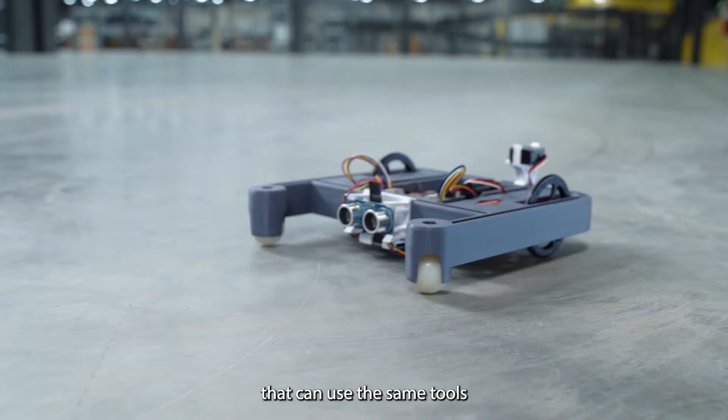The XRP, or Experiential Robotics Platform, includes all the hardware and software needed to build and program a robot that can use the same tools for programming full-sized FIRST Robotics Competition robots. This allows for a low-cost way to experience FRC experimentation on a smaller scale.

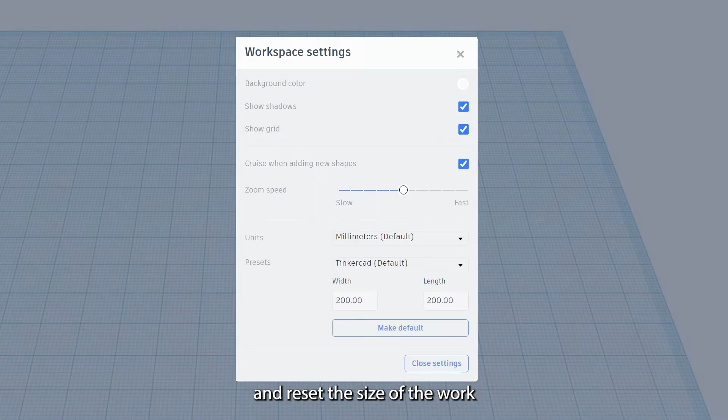Here we will go over how to easily print or make modifications to the chassis when your 3D printer's bed is not large enough to fit the entire chassis. The first thing we'll do is go into Settings and reset the size of the workplane on the project. In this case, we're using an Ultimaker S3 3D printer, and the bed size is 187 by 227 millimeters. Once you click the Close Settings button, you will see the workplane size update.

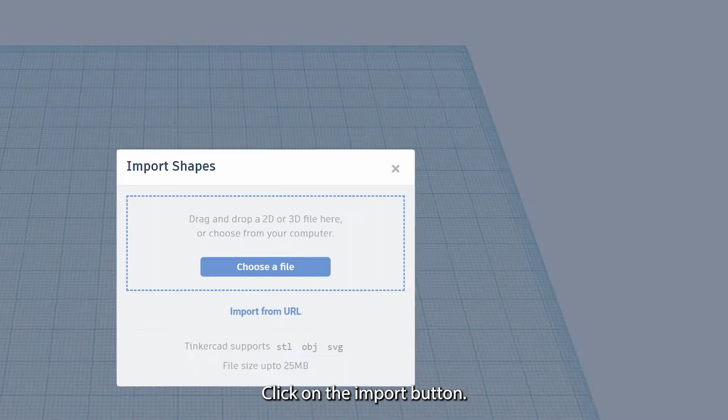Next, we will import the STL file from the computer. Click on the Import button. Not shown on screen, it loads another page where you can select the location of your file. Once you've selected your file, click OK. It will then load that file into the software. Next, click Import, and after a few seconds, the file will load into Tinkercad.

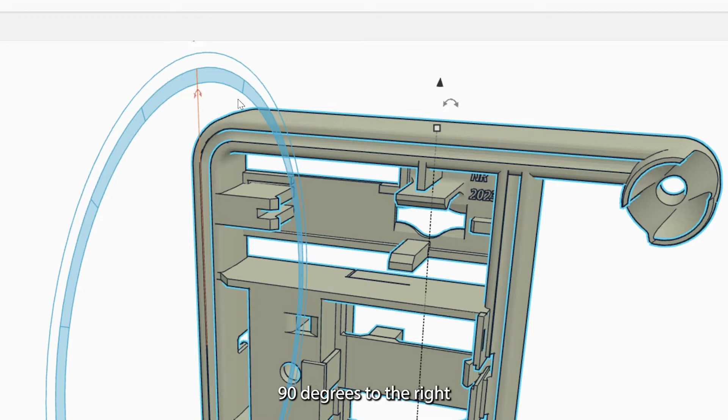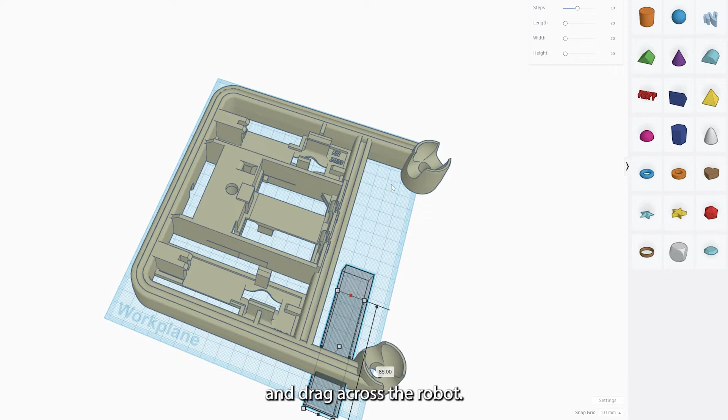Click the Rotate function and rotate it 90 degrees to the right so it lays the top side down. Once rotated, press D on your keyboard to drop the robot frame to the workplane. Next, we will move the robot to the center of the workplane. To start modifying, grab the Hole Cube tool and place it beside the robot. Once placed, grab one of the modification handles on the hole box nearest the frame and drag across the robot. Make sure the box is beyond the opposite side of the frame.

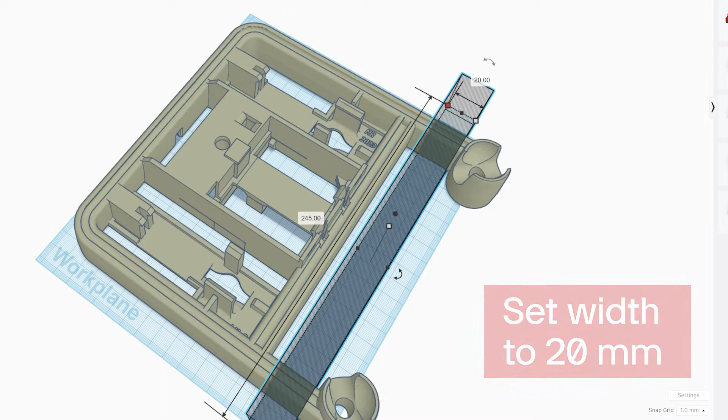Next, select the Hole Cube again and select the grab handle in the center of the box by clicking on it. Set the height to 50 millimeters to make sure it is completely above the frame. Then, click on one of the width grab handles. Type 20 millimeters into the width dimension. Next, duplicate both the frame and the hole cube by selecting each individually and clicking the Duplicate button.

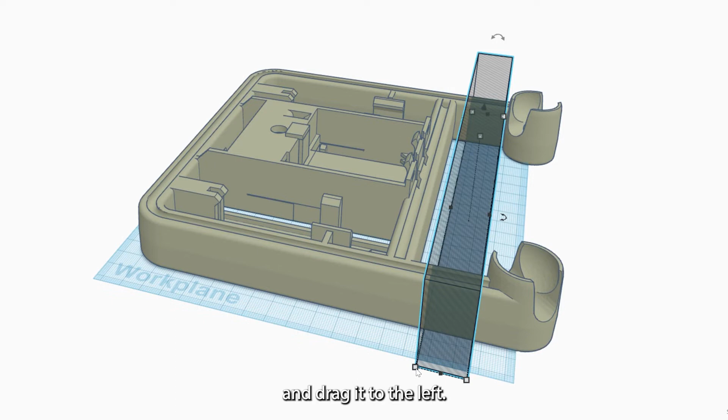Hide one of each of the frames and hole cubes by selecting one instance of each and pressing Ctrl-H on the keyboard. Once one of each is hidden, select the visible hole cube and drag the grab handle towards the back of the frame and drag it to the left. Make sure it is past the back of the frame. Select both the frame and the box and click Group. Grouping will cut off the part of the body that is inside the hole cube.

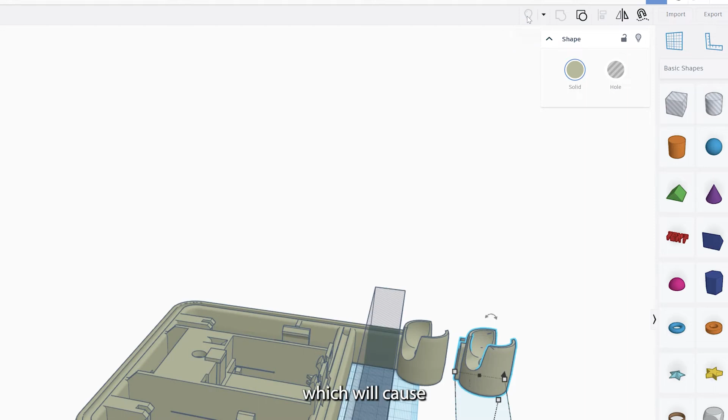Next, with the caster mount selected, and while holding Shift, click the right arrow key 5 times, which moves them 50 millimeters to the right. Now click the Show All button, which will cause the second instance of the robot to show. To make sure we don't accidentally select the first piece we modified, click on it and then click the Hide button. Next, we'll select the hole cube and click the lower right grab handle and drag it to the right.

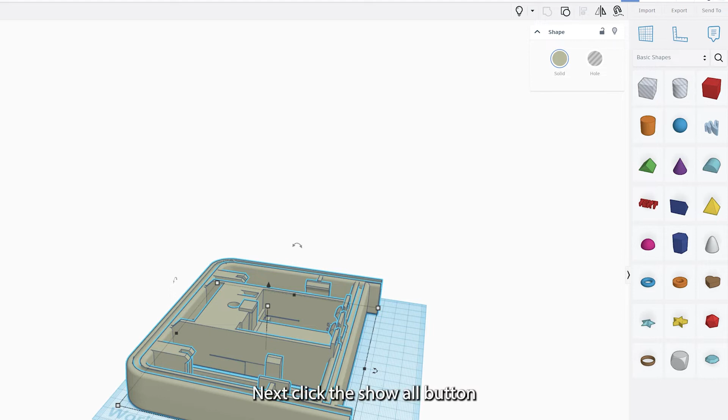Once the size is correct, select both the frame and the hole cube and click Group. This will remove the caster attachment pieces from the robot. Next, click the Show All button and both pieces will show on the screen. Select the ball roller pieces. While holding Shift, use the left arrow to move the casters to the left. By holding Shift, it multiplies the movement 10 times of the selected grid size. In this case, 7 clicks to the left will move the casters 70 millimeters.

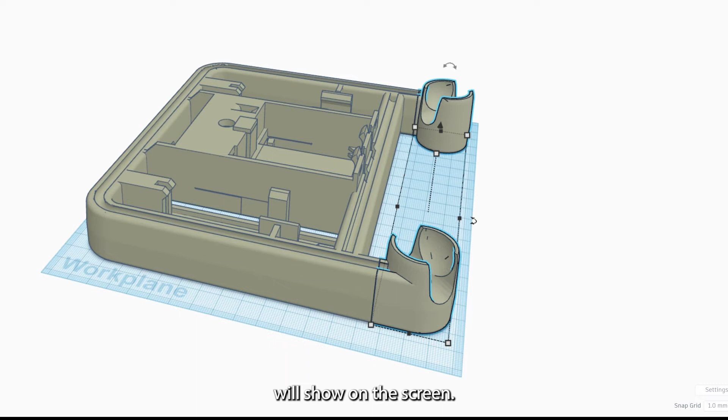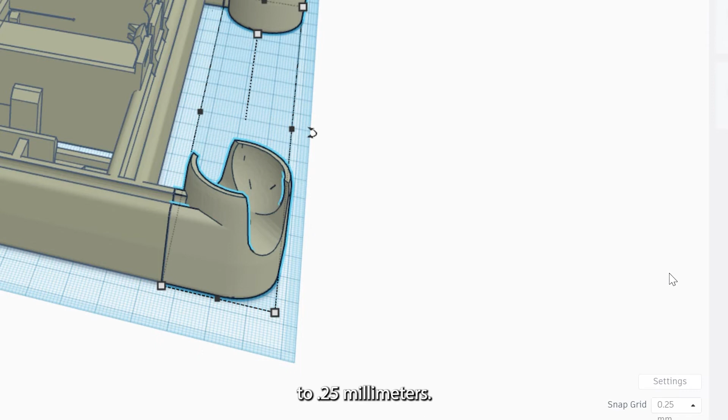The 70 millimeters is a combination of the 50 millimeters that we had moved to the right, along with the 20 millimeters that was removed. To make sure there are no gaps in the frame, we're going to move the casters over a bit more to the left to overlap slightly. Change the snap grid to 0.25 millimeters. Next, click on the casters and move one left arrow to the left. As I zoom in, you can see there's a slight bit of overlap. This slight overlap will close any gaps that may show up in the print.

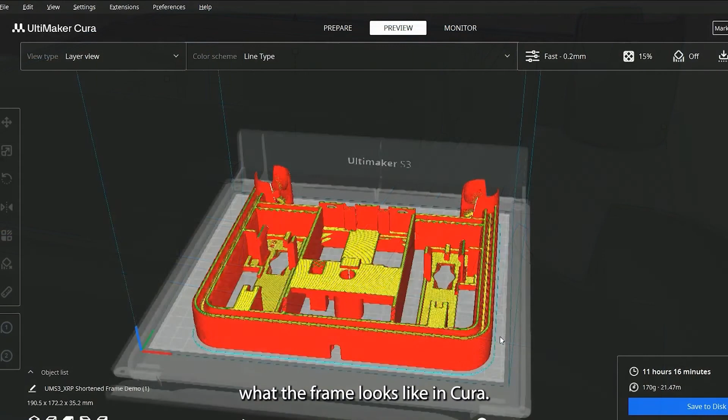Last, select both pieces and click Group. We now have our newly modified frame. We can click Export and choose STL from the options. Let's take a look at what the frame looks like in Cura. I've loaded an Ultimaker S3 profile. As you can see, it will fit on the print bed. I'll check the layers to make sure there are no gaps at the top and bottom layers of the frame. As you can see, they are solid, so this file is ready to print.